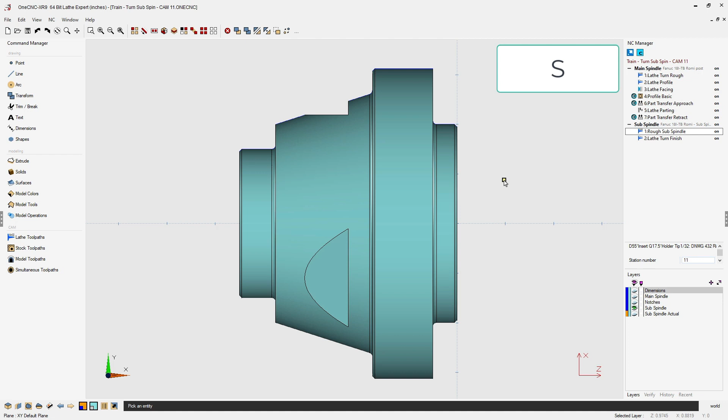Now in this video, what I'd like to do is demonstrate how we can perform a machining operation that will remove material from the very face of the part. Before we do that, we don't need the solid model, so I'm going to hit the letter S on the keyboard to go into select mode, and then I can left click that solid model. And now I can temporarily hide the solid model by using the blank command. Now a shortcut for the blank command is simply hitting the letter B on the keyboard, just like that. It should also be noted that you can access the blank command up here on this top toolbar.

Now in previous videos, when we performed a facing operation, we had used a command called face. This machining operation is 100% dedicated to performing facing operations only. All right, very versatile. It's a great command. But what I'd like to show you is that if you'd like, you can actually use the turn face finish machining operation to remove material from the face of the part.

Now before we do that, I do need to measure the distance from the very top of this chamfer to the very bottom. Now the reason for that is we're going to be selecting just this vertical line for our facing operation. So I need to know how much I need to extend the toolpath so I can go past center line. Now to measure that distance is very easy, and OneCNC supplies a couple of different ways to do that.

We're going to head down to the lower right hand corner, select our verify tools, and we're going to use this option, which is fourth from the left, called retrieve a distance between two pick positions. This is like a measuring tape, and all you need to do is take your cursor and left click, and then we're going to come down here and left click as well. Now if we look within the results in the lower right hand corner, you can see that the Y distance is 425 thousandths.

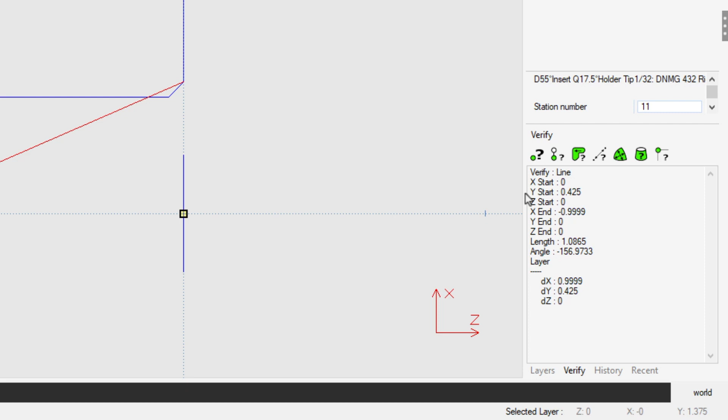Now there's something else I want to point out. Notice how these values are in X, Y, and Z. And that's because by default for CAD only, OneCNC uses the mill coordinate system for CAD, and that's what you're seeing in the lower left hand corner. For manufacturing, for the CAM side of things, OneCNC is of course going to output X and Z, and that's what you're seeing right here. So CAD, X and Y like milling, for CAM, X and Z for your turning toolpath.

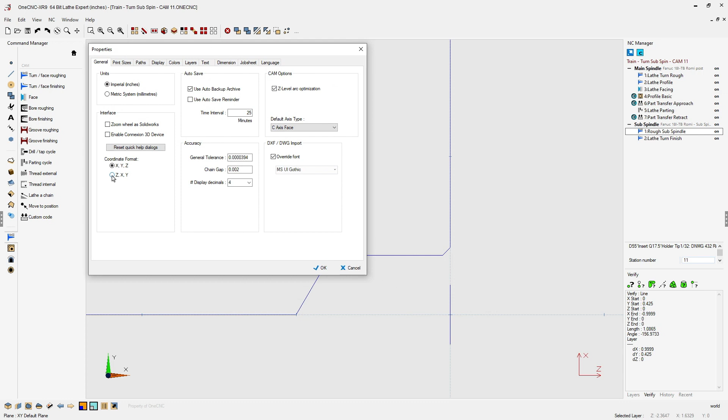Now if you'd like, you can set up OneCNC so that it also uses X and Z for the CAD side of things. Let me demonstrate how to do that. Take your cursor, head up to the upper left hand corner, select File, OneCNC Properties, and within this first dialog box, just click this option under Coordinate Format that says Z, X, and Y, and then click OK.

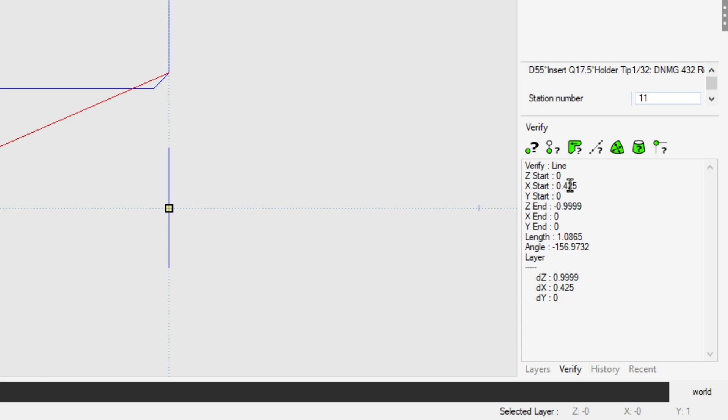Now watch what happens. I'm going to use the exact same verify command. I'm going to left click the top of the chamfer, left click down here just like that, and notice now that the distance is represented in X. So within OneCNC, you have the flexibility to output these values in Z and X or X and Y, whatever coordinate system is most comfortable for you.

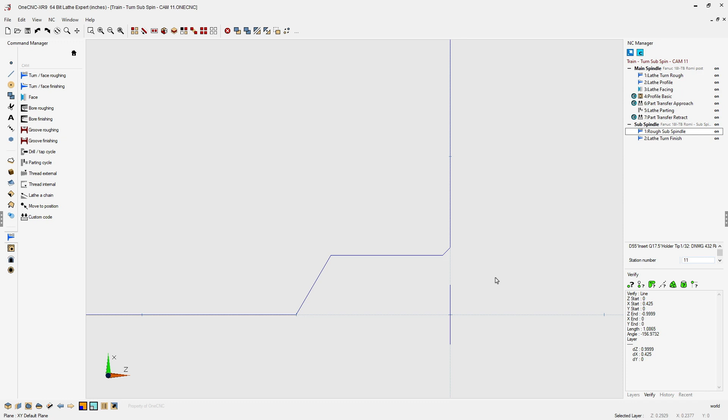All right, so we want to remember this 425 thousandths. If you'd like, you can highlight that, right-hand mouse click, and select copy, and OneCNC will put that value within the clipboard. I'm going to hit escape, going to zoom out just a little bit, and let's head over to the command manager.

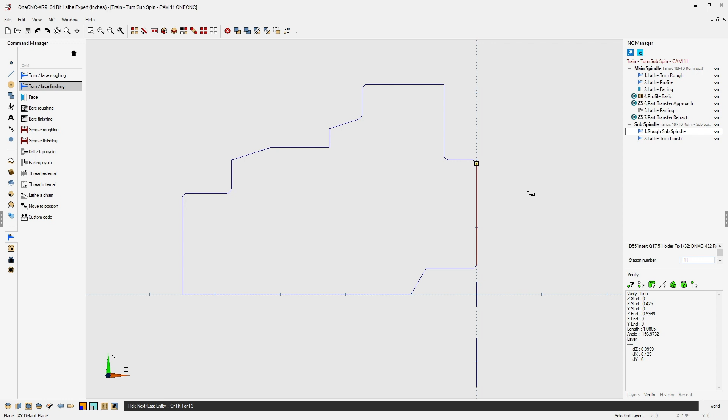And what we're going to do is select our turn face finishing operation. I'm going to take my cursor and left click just that vertical line, and now we're presented with the four arrows. I want to machine on the outside. I want to machine from the top to the bottom, so I'm going to left click that arrow. Now because that's the only piece of geometry that I'd like to apply toolpath to, I can simply right-hand mouse click, and then OneCNC will bring up our very first dialog box.

Just like with these previous machining operations, when defining a tool, we need to select a tool from the tool library. Now you can access the tool library by clicking on the tool changer button or just left clicking on the tool graphic. I'm not going to do any of that because I want to use the exact same tool that I had used before. I'm going to leave the turret position alone, even though I may come back and edit that a little bit later on. Don't need to worry about the tool offset. We're going to have that set to 1 as well.

Coolant and work offset, we're just going to be using the defaults that the OneCNC post processor is going to output. For this, I'm using inches per rev at 5 thousandths. My RPM is set at 550. And of course, you can use constant surface footage. If you'd like, you can also set up a max spindle if you want. You can also overwrite the spindle direction by just activating this option and clicking whatever direction you'd like. I'm going to uncheck that and use the default.

And as discussed in our previous video, you can also output notes if you want to. I'm going to leave notes alone. Notes is the ability to type in whatever you'd like, and those notes will appear within the CNC code. I'm going to leave that alone for this example, and let's click Next.

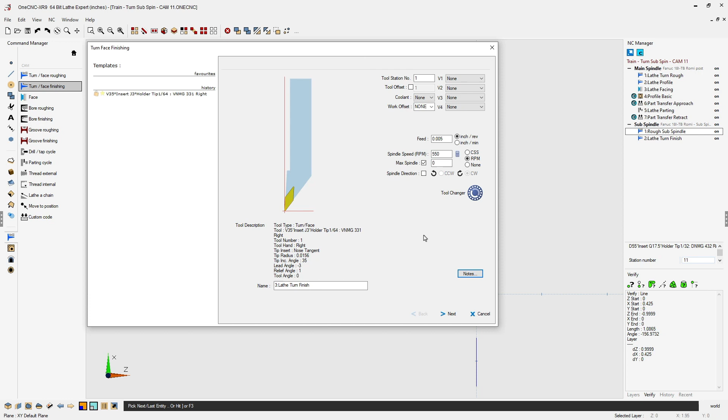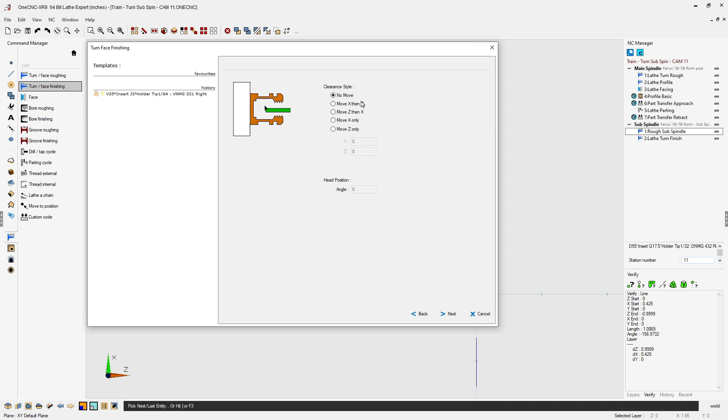Now here we're presented with the clearance style. This is how the tool is going to move away from the part geometry after the toolpath. Typically, 95% of the time, you'll never have to change this. The only time you'd want to modify how the tool exits the machining operation would be if you're performing more complicated toolpath. But typically, you can leave this set to just no move. I think that looks good, so let's click Next on that.

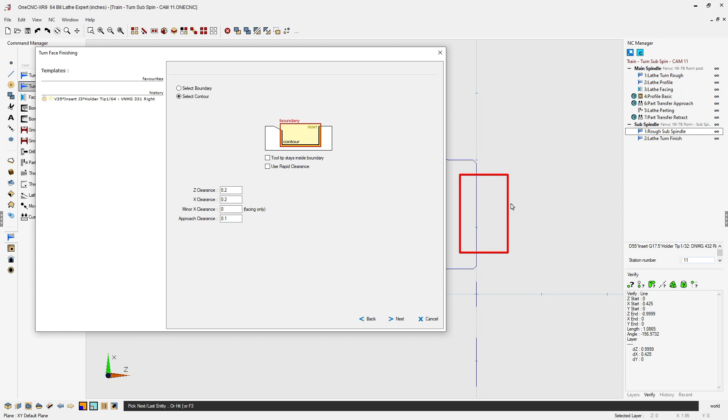All right, we have two options here. We have Select Boundary or Select Contour. We're going to be using Select Contour because we want to apply toolpath to the geometry we had selected earlier. Also previously noted in our last video, if you have a rectangle created, you can also restrict the toolpath to a rectangle by using this option called Select Boundary. But we're just going to leave it set to Select Contour just to keep things nice and simple.

Now, Z clearance and X clearance, this is where OneCNC is going to move the tool at the very beginning of the toolpath and where OneCNC is going to move the tool at the very end of the toolpath. And let me explain how this works. The Z clearance and X clearance in this example are measured from the very beginning of the geometry that we selected here. Z clearance of 200 thousandths simply means that the tool is going to start 200 thousandths in front of the part. And then the X clearance of 200 thousandths means the toolpath is going to start up here at 200 thousandths away. And so the actual start position will be X 200 thousandths, Z 200 thousandths, right about there.

All right, so what is the minor X clearance? This gets used for when you're performing a facing operation. Remember that 425 thousandths? That's the distance from here to here. So if we wanted to, we could come over here, right-hand mouse click, and select Paste, and OneCNC would paste in that value. That's going to tell the toolpath to go an additional 425 thousandths all the way to centerline.

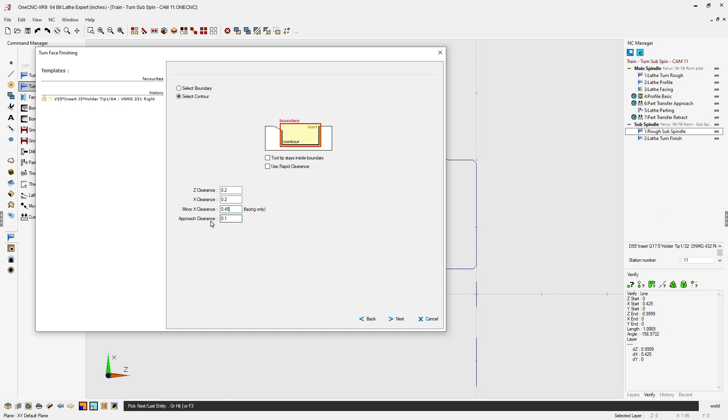Now in actuality, you'd probably want to go a little bit farther than that, so why don't we change that 425 thousandths to 450 thousandths. When you're using the profile operation for facing, the approach distance is the distance the tool is going to approach along the Z-axis. And here we have it set to 100 thousandths. Let's click Next on that.

All right, so here are the main parameters for our facing operation. We have longitudinal or facing. We definitely want it set to facing. Auto simply means that we're going to cut in the direction that we selected the geometry. That's from top to bottom. That's absolutely what we want, so we don't need to change that. We're not going to take a look at Smart Finish in this video, but we will take a look at that in future videos, so we're going to leave that alone.

For cutter compensation, you have automatic default, and what this does is this tells OneCNC to account for the tool nose radius. If you click this set to none, then OneCNC will not look at the tool nose radius and it will just guide the tool by the theoretical control point. Typically, you want it set to automatic default, so OneCNC does indeed recognize the tool nose radius. In addition to this, you can output cutter comp by using any of these three options right here. All right, we're going to leave that set to automatic.

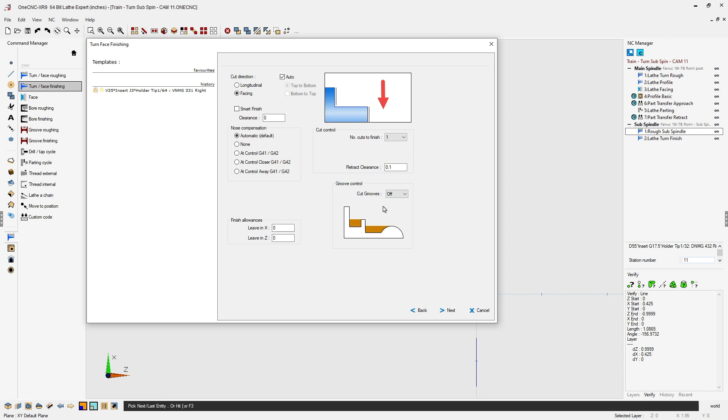For cut control, you can take several passes, but let's just leave it set to 1 for that. And for finish allowances, we're going to leave this set to X0, Z0 because this is going to be a finish pass. We don't need to worry about groove control because we have no grooves, but you can see that with cut groove set to off, the toolpath will ignore grooves. If you have it set to on, OneCNC will take the tool and cut inside the groove as far as it can without violating any of the geometry. So it really doesn't matter what we have this set for in this example. We'll click next on that.

All right, so now we have our cut from start and cut from end. We talked about this in great detail in our last video, but let me just quickly set this back to the defaults just to give you a quick overview of this. Cut from start is how the toolpath begins. If you leave this unchecked, you're going to notice that OneCNC takes the theoretical control point of the insert and puts it at the very beginning of the geometry. If you activate this by clicking, notice now that the toolpath is going to take the tangency of the insert to begin the toolpath. And of course, if you click entry amount, you could type in a value, and it's going to tell OneCNC to start a little bit before. In this example, 50 thousandths. That means the toolpath is going to start 50 thousandths before the beginning of the geometry.

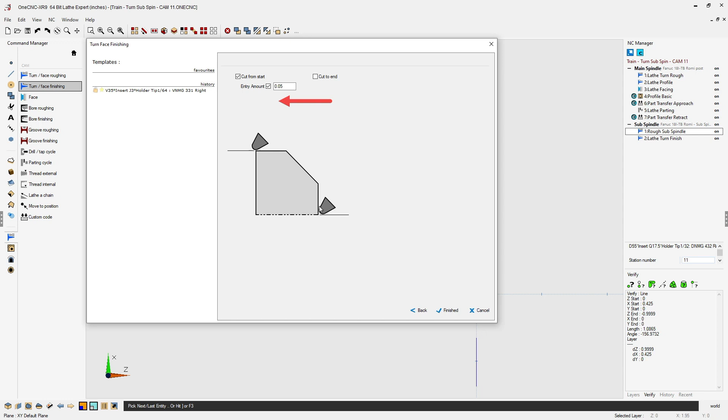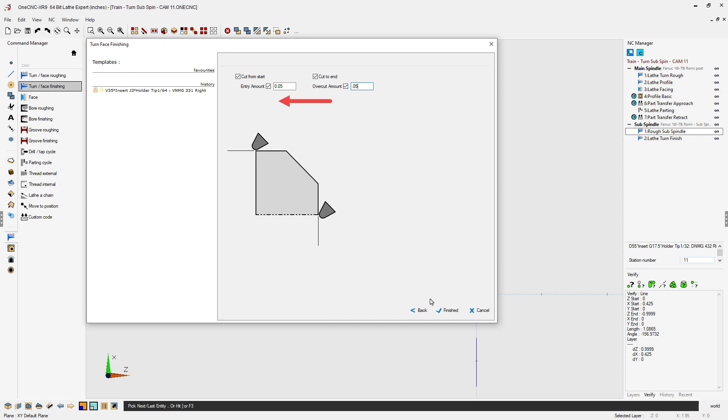Cut to end works exactly the same way. If it's unchecked, OneCNC will take the theoretical control point and take it to the very end of the geometry, plus whatever other amount we'd added on there earlier. Remember, we added 450 thousandths. But if you click cut to end, OneCNC will take the tangency of the insert to that location. And of course, you can also add an additional amount if you want to. Okay, I think all that looks good. Let's click finished and let OneCNC generate the toolpath.

You can see the toolpath has started 200 thousandths away in X, 200 thousandths away from Z. It's rapided till it came to 100 thousandths before, it's performed that approach move of 100 thousandths. And then we fed, and then we've gone past the very end of the geometry, an extra 450 thousandths. We've moved away from the part, and we have returned back to X of 200 thousandths and Z of 200 thousandths. All right, that's it for this video.